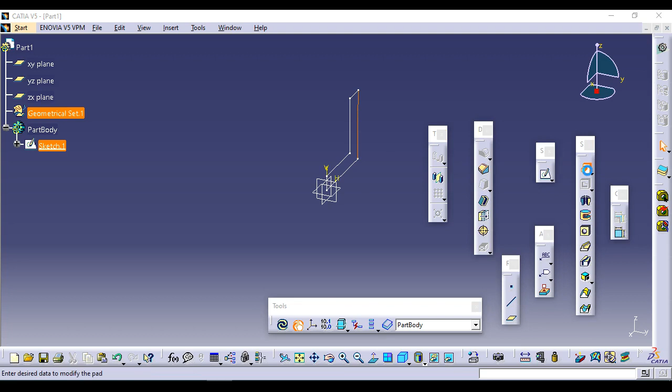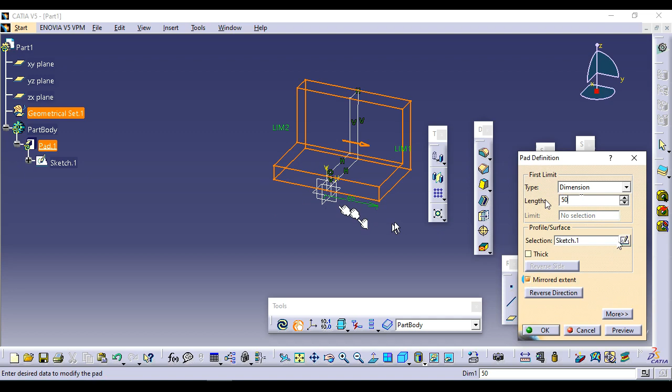Then I'm going for, let us take 65 mm. Now I'm going for mirrored extent. I want 65 mm on either direction, so the total is 130. We can change the dimensions also if you want, maybe 50. Let us take 50. So click OK.

Now we are going to create a stiffener here. I need to draw something at a distance. So how can I draw something at a distance from this object? That is possible by using the reference point, reference line and reference plane toolbar. That reference toolbar is this.

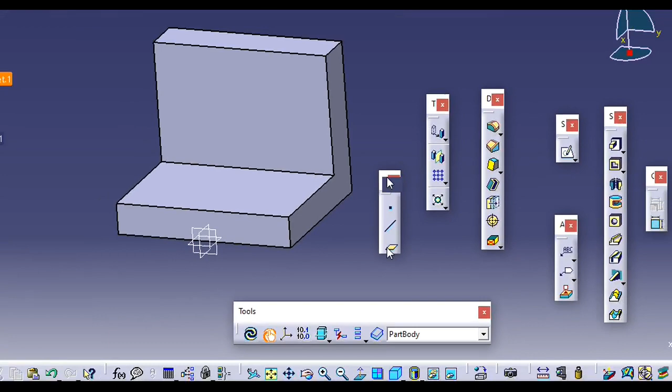So this is the point, line, plane which we can use for creating our reference planes. By using these reference planes we can construct the object very easily. So let me show you how we can use them. Let me click the reference plane. Once I click the reference plane, this is how the plane type will be highlighted.

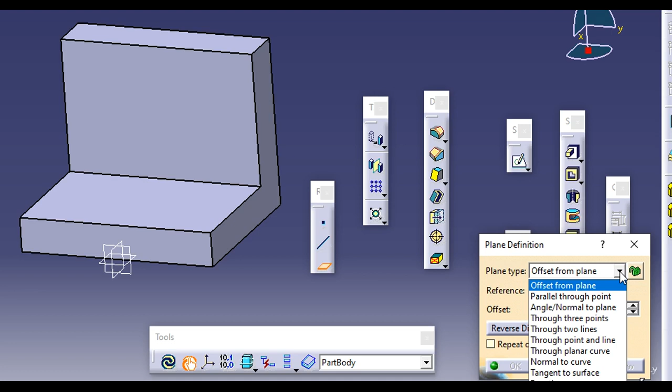You can create different types of planes here. You can create an offset from the plane, parallel, normal, or tangent to the surface. So you can create different types of planes. For now I'm creating an offset from the plane, as the name indicates.

From the plane means we require one plane, and from that plane we can create a reference. If you observe here, I am considering this as my reference plane. See, it is asking for my reference. So I am selecting this as my reference. Now I want it at a distance from this plane.

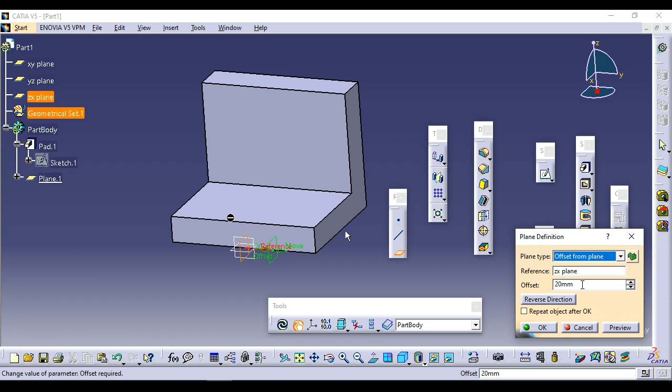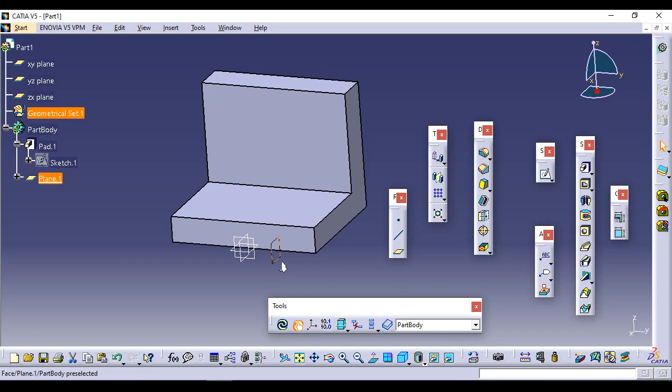If you remember, this was given as 25 mm, so I'm going for 20, creating an offset at a distance of 20. I'm clicking OK. Now I got a reference plane which is at a distance of 20 mm from this horizontal plane. Now select this plane and click sketch.

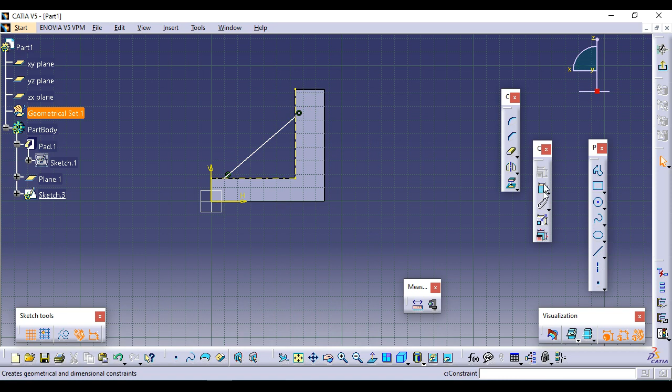Once we get into sketch mode, select this line, project, and if you want, you can convert it into an axis line. Now you need to draw a line. Then you need to go for constraining. So I want 65. It is in white, so it is not fully constrained.

Click. Let me further zoom it, and use the constraint command, point and the end point. Click OK. If you want, you can also change the dimension. Now let us concentrate on the

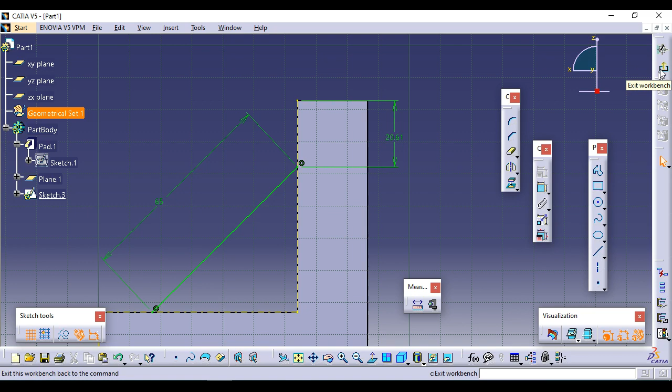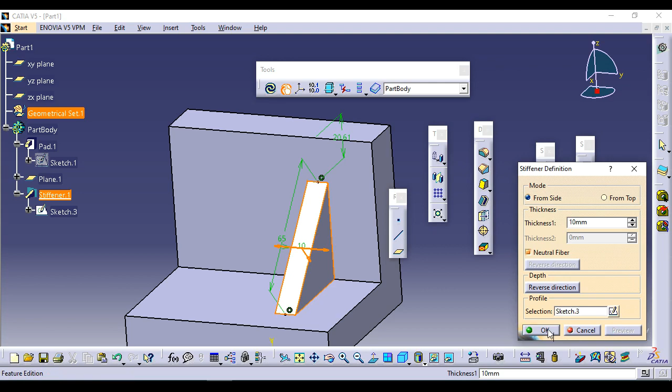stiffener. Now I'm going for the stiffener icon. It is coming because it has thickness in both directions. Suppose I want 10 mm thickness, preview. So this is how your stiffener will be. A stiffener is nothing but a support. So this is how your stiffener looks like.

Now if I want the same stiffener at a distance in this direction, maybe 40 mm from this plane, how can I draw it? To create one more stiffener, there are many ways. One way is mirroring. You can create a plane at a distance. Suppose this is at the center.

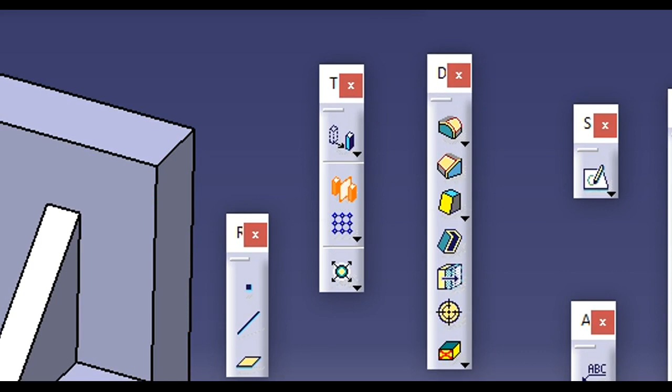You need to create a plane, or if you have a center plane, you can directly click the mirror command, click the plane, and it will automatically mirror whatever stiffener you have drawn. Once again, the mirror command is present in your transformations toolbar, and click on this plane.

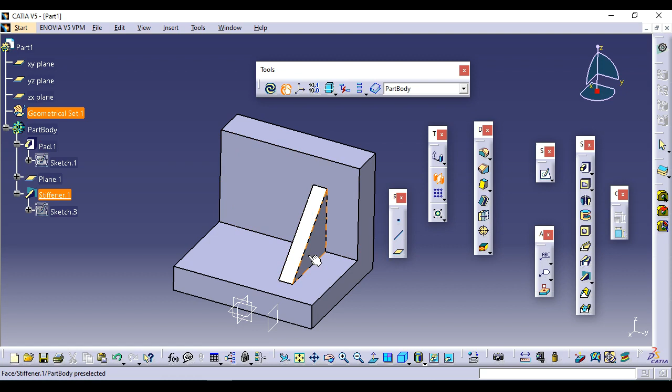Why this plane? Because this plane is parallel to the stiffener drawn previously. Once I click, it automatically shows you the stiffener. Click OK, and that's how you get it. In most CAD part designs, we're going to frequently use these reference planes and the mirror command. These are things you must know for part design.

Apart from this, there is a toolbar here where we change our geometrical set and part body. Once you have drawn something, it can be updated by using this icon. The keyboard shortcut is Control plus U. If I click this, it will update my drawing. Whatever you have drawn will be present here.

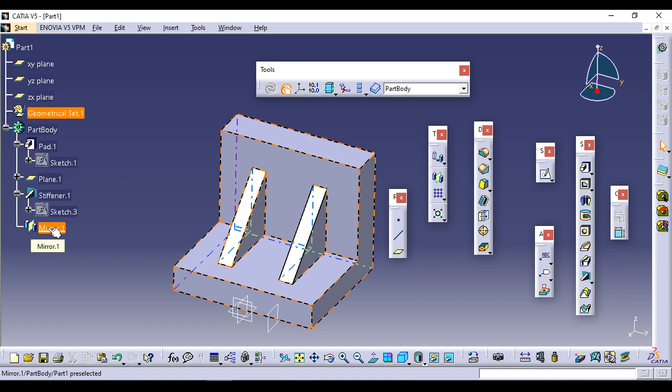We have drawn sketch one, created a plane, created a line so that we can apply the stiffener, and then done the mirror. These are the operations you have done for your diagram, and the design tree will have every information.

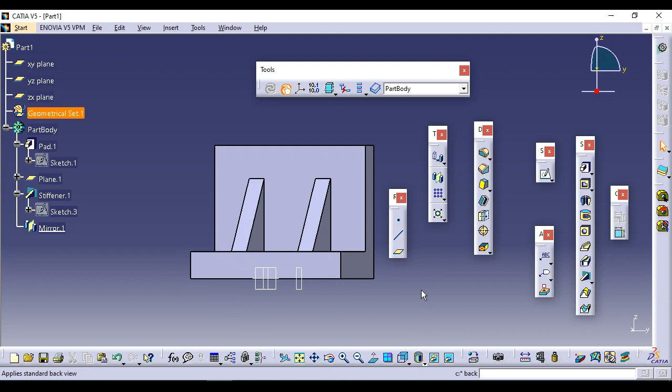Now if you want to see different views, this is the view toolbar. At present it is in isometric view. Once I change to front view, this is how you can see it. Back view, side view, top view. You can change the view orientation.

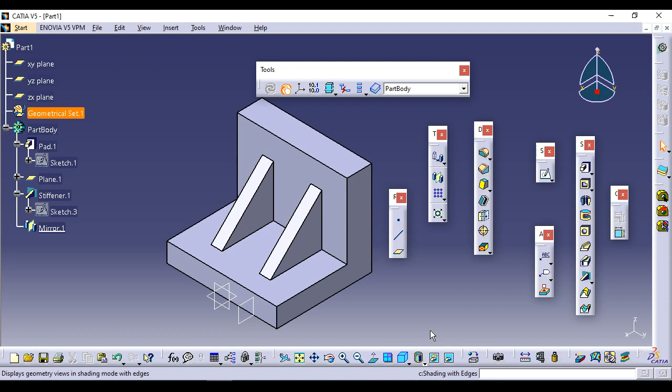If you want to see the wireframe model, you can also see the wireframe. You can also see the surface with edges, and surface without highlighted edges. This is how your diagram will look.

So these are the basics. Once you have your software, try to see what the other icons do. Once you understand the icons you have, it will be very easy to draw any part model. I hope you are completely aware of the interface of CATIA. In the next class we'll start drawing our 3D part models.